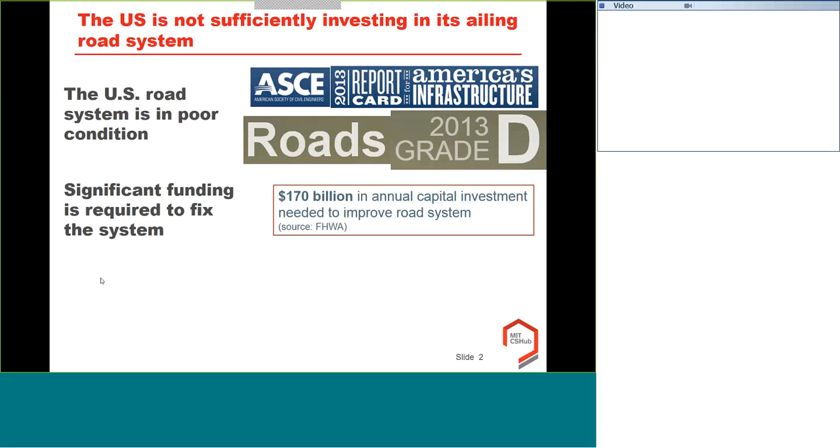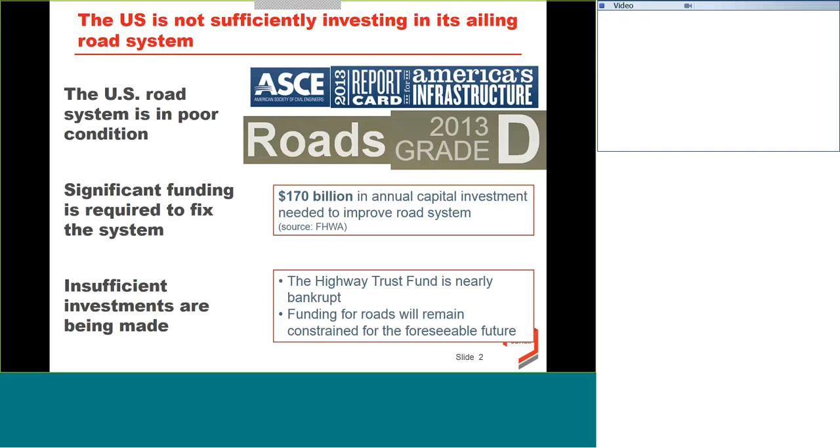We add to this the challenge that insufficient investments are being made in the road system, and so as a consequence, we have this challenge of how do we deal with our deteriorating road system within an environment of limited funds.

That just adds to the financial pressure that governments are dealing with. Another element in this environment is that the FHWA has issued new performance management rules due to the MAP-21, or Moving Ahead for Progress in the 21st Century legislation that was passed a few years ago. FHWA just recently issued new rules about what transportation agencies need to do in terms of their asset management plans.

There are several measures related to tracking conditions and setting targets, but some of the ones we're particularly interested in are related to what they're going to do for risk analysis, life cycle planning, and what are some of their investment strategies. That's all, I think, related to getting the most out of the investment dollars that we have.

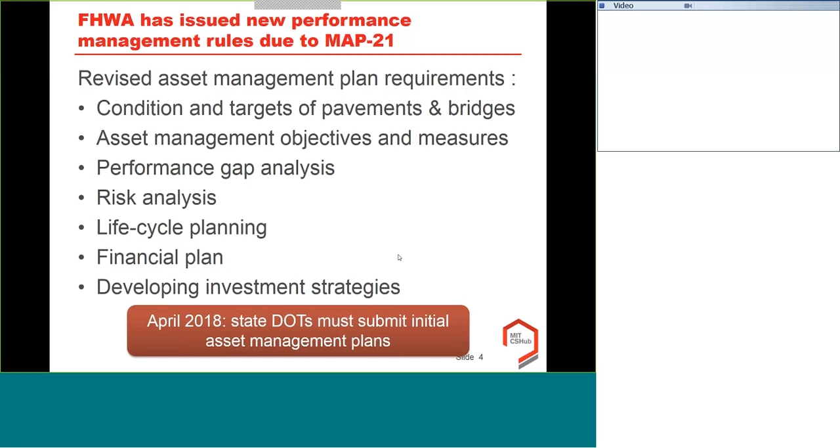DOTs are thinking about this a lot now because they have to submit initial plans for how they're going to meet some of these rules by next April.

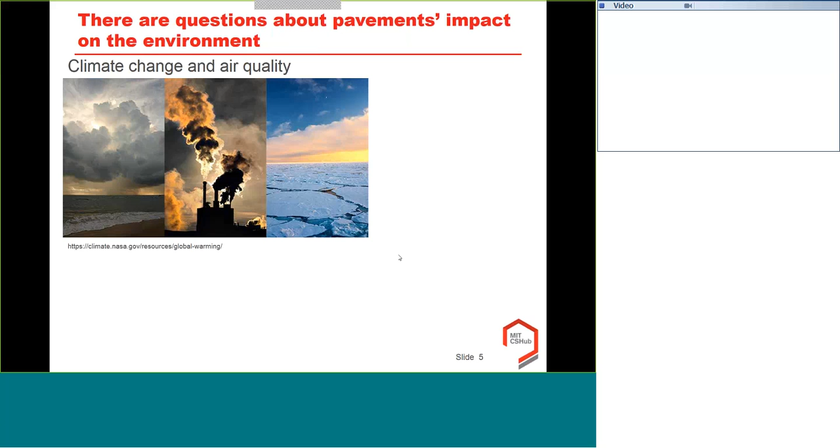Another element that plays into this is that there are a lot of questions about pavements' impact on the environment, whether it be about climate change or air quality. People are interested in pavements and also the vehicles driving on the pavements. Urban heat islands is another big topic, and people are interested in how the pavements in our cities may or may not be contributing to those issues.

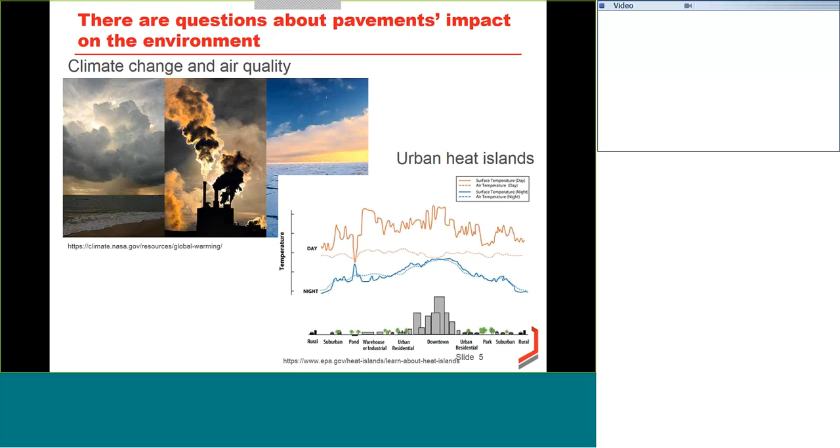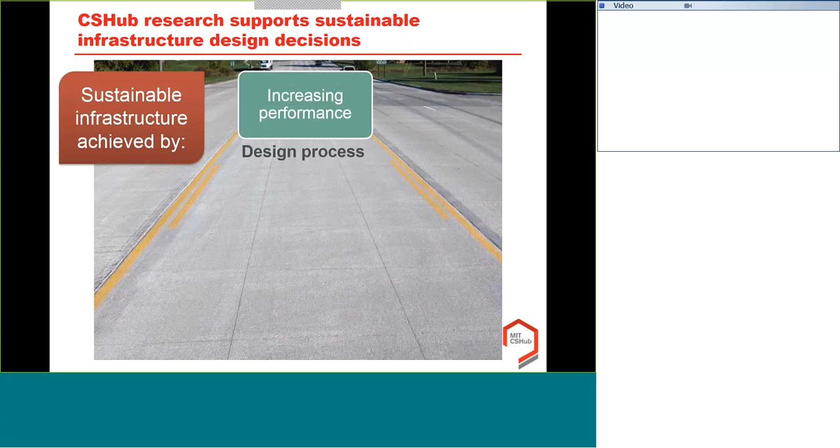The research we're trying to do at the Concrete Sustainability Hub is meant to really support sustainable infrastructure design decisions, and we see that sustainable infrastructure is achieved by a balance of a couple different factors. One, you need to increase the performance of the pavement or whatever type of structure you're interested in. Two, you need to reduce costs, and three, reduce environmental impacts. That's how we really get the most bang for our buck.

What's challenging about this is that you really need to analyze and balance trade-offs in these three different areas, and there are a couple different techniques you can use, like to increase the performance.

What you want to do is use the design process to reduce cost—a method I'm going to be talking about, lifecycle cost analysis, can be done for that—and for reducing environmental impacts, you can use lifecycle assessment.

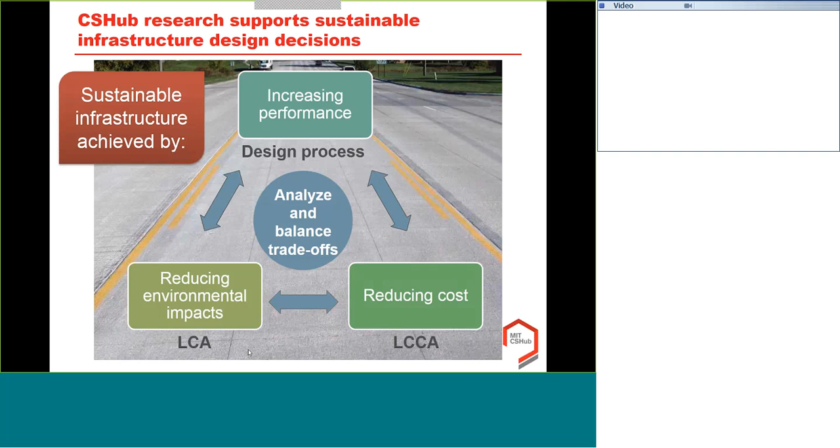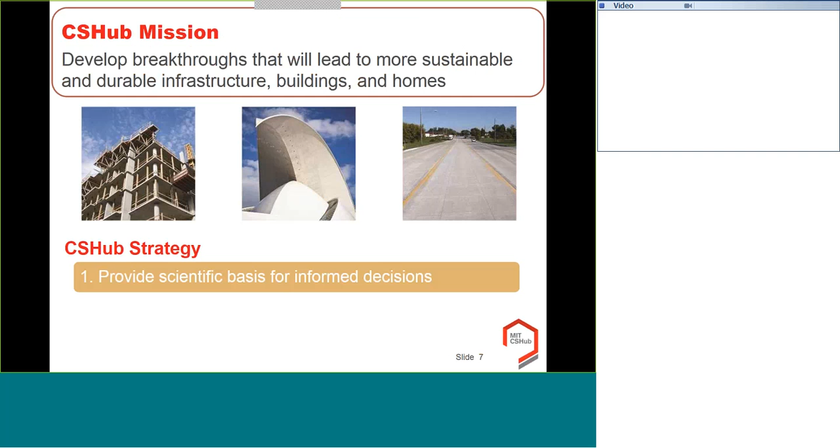So all those things need to be looked at together, and that's something we try to do in the hub. Our mission is to develop breakthroughs that lead to more sustainable and durable infrastructure, buildings, and homes, and we do that with a three-pronged strategy: one, providing a scientific basis for informed decisions; two, demonstrating the benefits of a life cycle perspective; and three, transferring research into practice.

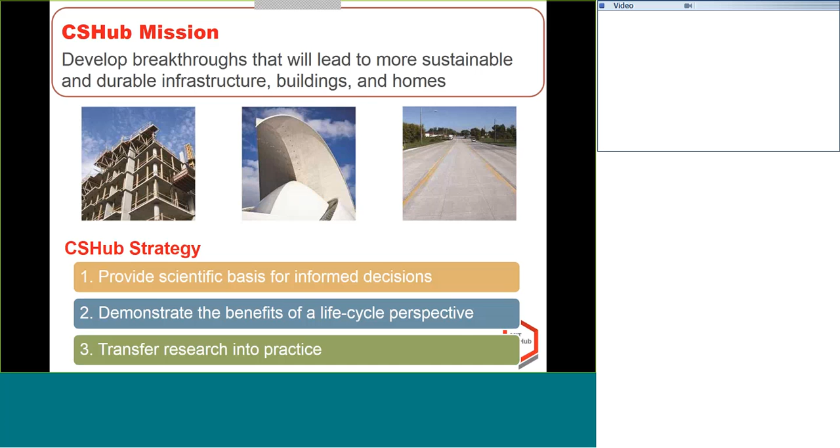And some of those will be themes throughout what I'm going to be talking about today.

But I think a unique element of our team is that our approach is holistic and multidisciplinary. We have people who specialize in material science and what's happening in cement and concrete at a very small scale, people who specialize in engineering related to pavements or buildings, and people who look at economic and environmental issues as well. So we try to look at all those things together in order to support those sustainable design decisions.

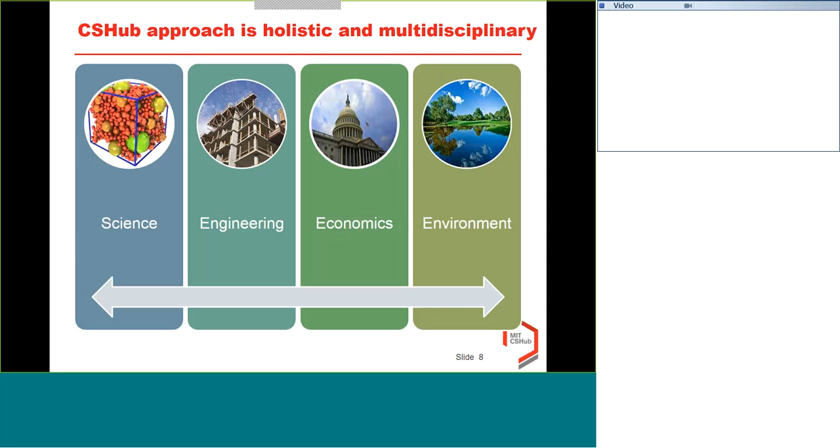Our pavement research goals really are trying to drive the pervasive use of life cycle costing and life cycle assessment for pavement design, pavement type selection, maintenance decisions, and asset management. I think that long-term perspective is really important in all those areas. But when you take that long-term perspective, it's important to have a robust decision-making process—meaning that you're confident in the results despite any types of uncertainty or risk you may run into.

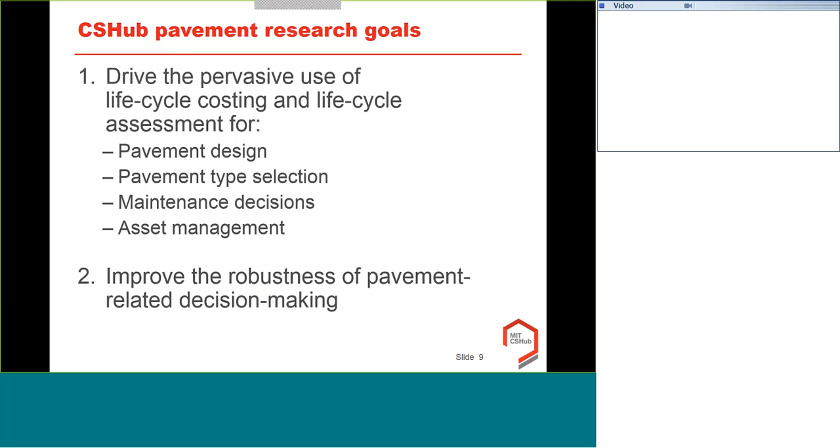So going back to these different topics that we have, these are showing some of our different research topics down here that fall within these different buckets. And then these topics also fall into, some of them are more related to specific pavement projects, and some of them are more related to pavement networks.

So we have some research being done on the durability of concrete pavements that's really heavily on the science side, but also involves some engineering. We also have some research looking at the environmental impact of pavement albedo, which is related to the reflectivity of the pavements. That's also heavily involved in science and some engineering as well.

We have some research on pavement vehicle interaction, which has to do with the rolling resistance of vehicles on the pavements, and I'll talk about that—that's pretty much in the engineering bucket. And then there are several topics on the economics and environmental side as well.

Life cycle cost analysis is really geared towards individual projects, as is life cycle assessment. But there are also some network analyses that can be done as well, and I'll be talking about some work we have to look at how you allocate funds across different pavement projects, and also some network analyses that can be done of pavement vehicle interaction.

I'm also going to be talking about some work we've done looking at inter-industry competition, which kind of falls in between that network and project scale. But what you'll probably notice about all these is that they really are representative of that balance I mentioned we need to have between analyzing performance, cost, and environmental impacts.

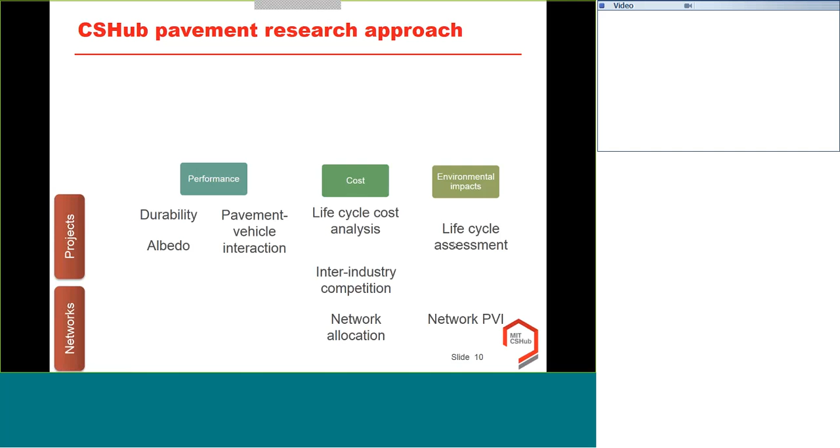Basically, these topics over here are mostly about performance, whereas we have quite a few about cost and environmental impacts. And that's because we think those really have to be viewed together.

What I'm going to be talking about first is basically our research that's more at this project level scale, so pavement vehicle interaction, life cycle cost analysis, and life cycle assessment. Then in the second half, I'll get more into some of these network related analyses and leave the durability and albedo topics for their own presentations at a future webinar.

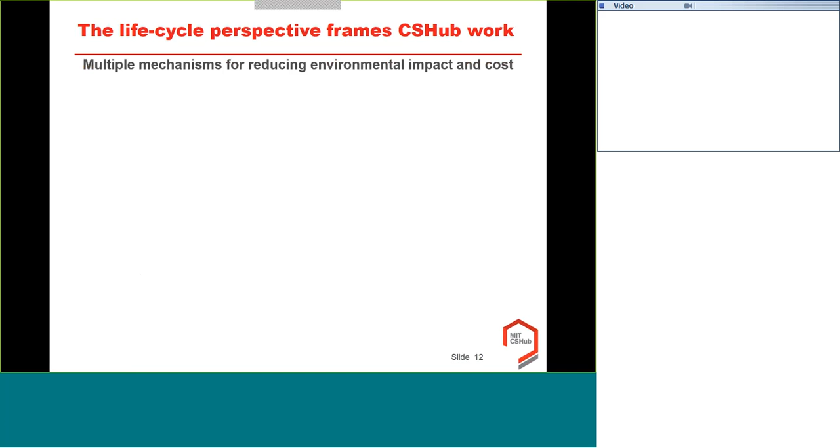All right, so on the life cycle side of these things for particular projects, this life cycle perspective is really important for the work that we're doing. And the reason is that there are multiple mechanisms for reducing environmental impact and cost.

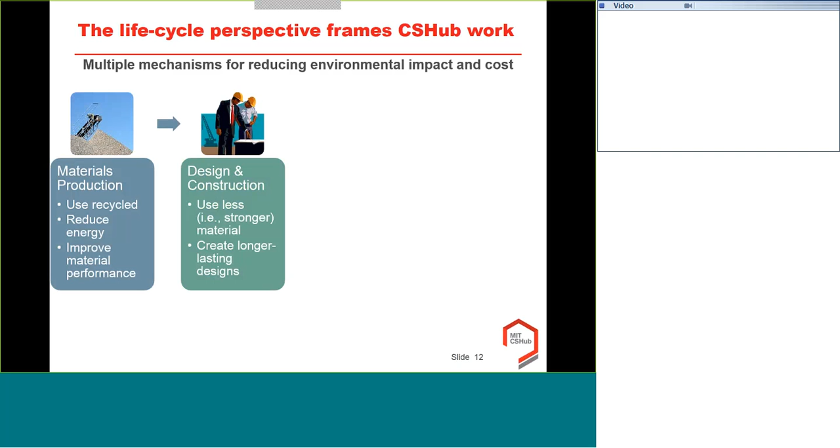One can improve materials production by using recycled content or reducing energy associated with that, improving material performance. One can also design or construct pavements so that they use less material, perhaps by using stronger material or creating longer lasting designs. You can also design them so that they reduce the amount of vehicle fuel consumption or heat island effects and enable material recovery at end of life.

The key thing is that any one of these different strategies could have implications on the rest of them, and their significance also needs to be compared.

So to really prioritize which of these mechanisms is going to be most important requires a trade-off analysis of performance and life cycle environmental impacts and costs. You really need to see that in the whole life cycle perspective.

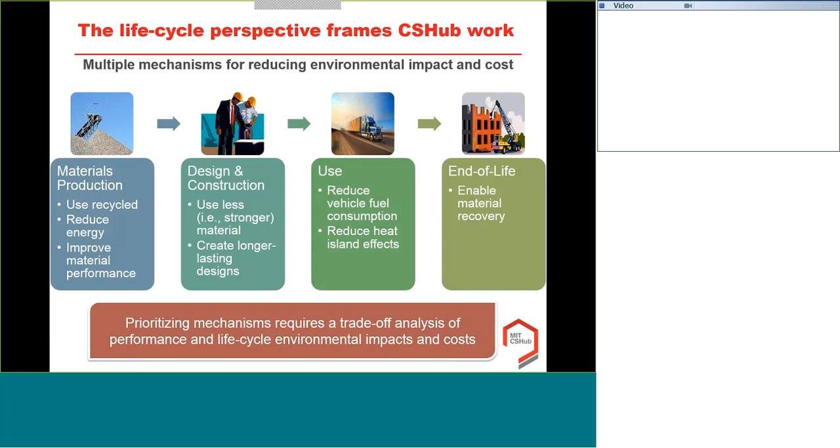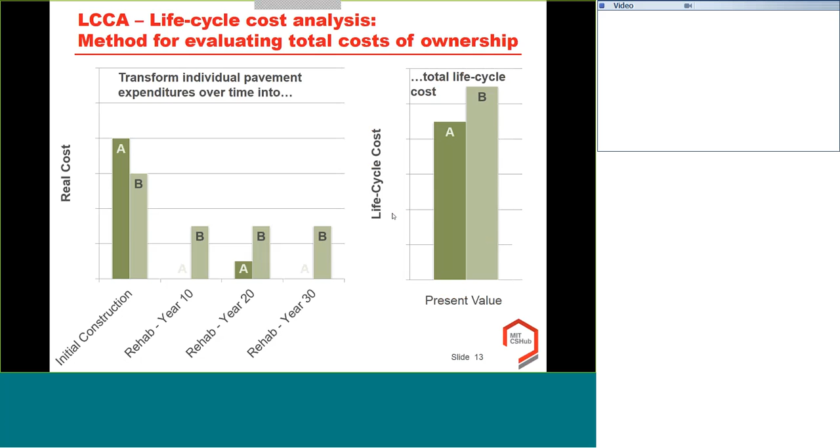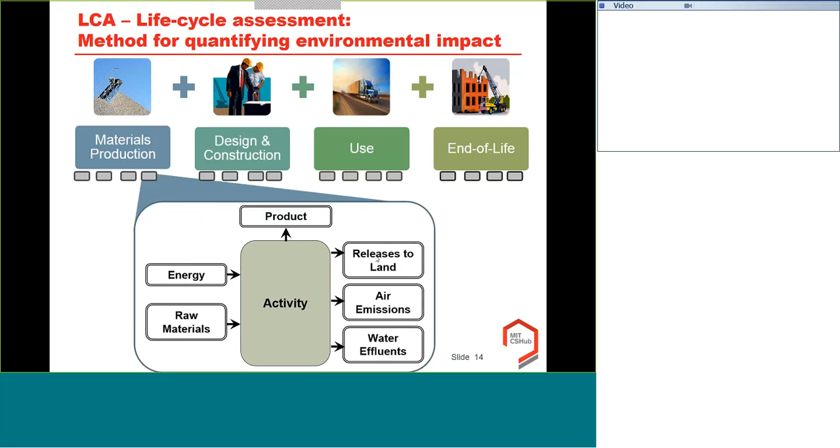Now, these processes can be and have been used for pavements, but a big motivation for us is thinking about how you can integrate these into the design process. The issue is that pavement design is iterative. If we talk about a general design process, what usually happens is that there's a design proposal based on a particular context: what the kind of traffic is, what the climate is, what the soil conditions are.

We start with that initial design proposal, and then what's increasingly happening is that design is analyzed using mechanistic empirical design principles. So we check: does it meet our performance requirements? Does it last for a certain number of years? And if not, then we might iterate and make some tweaks, making it thicker, changing some of the materials, whatever it is, until we come out with a final design.

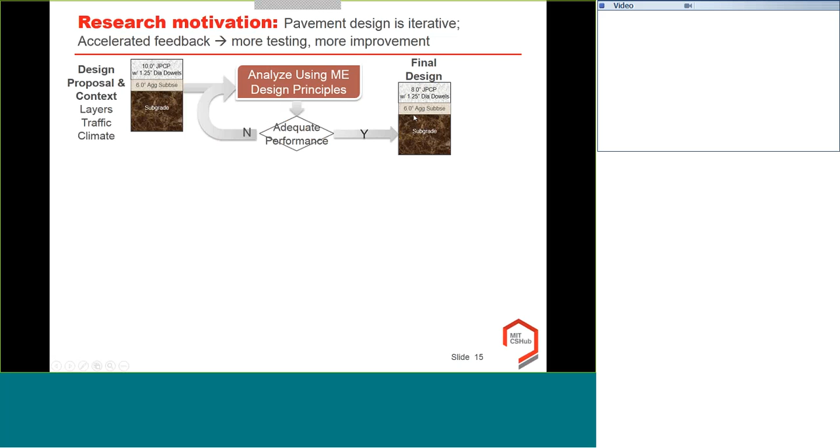What currently happens now is that if you're going to do a life cycle assessment or a life cycle cost analysis, you take that final design and develop what we call a bill of activities, which is basically all the details we need as inputs to do that LCA and LCCA. As a consequence, when we do that type of analysis, we don't have any opportunity to change the design. There's a disconnect—we're only doing analysis on a final design.

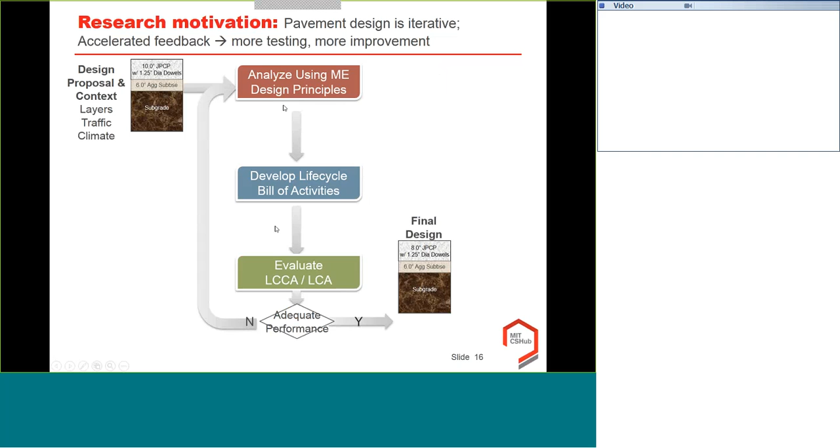Instead, what we'd like to see is that each time you analyze the design, not only do you analyze its performance requirements, you also analyze its cost and environmental impacts as well, and then can iterate on all of these three things together, so your final design is kind of an optimization of all of those things together. So what we're trying to do is integrate these three different things within our project level analysis.

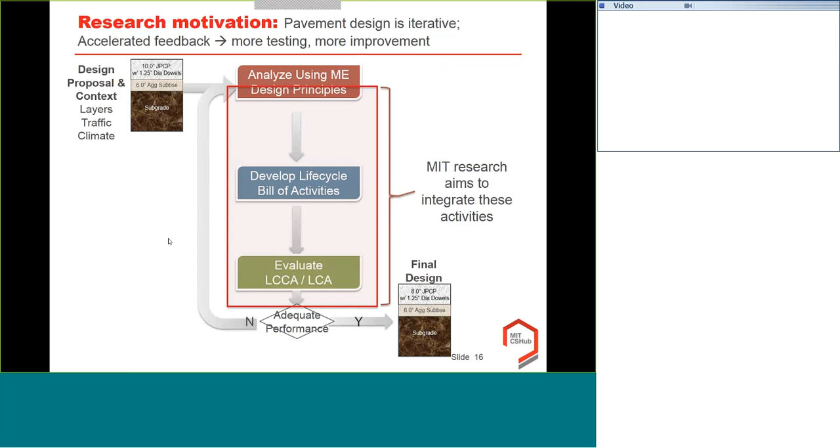What I'm going to do is talk about some of the key accomplishments from our work in this cost and environmental impact space, and then shift to some of our key findings. One of the things we've done in this space is create a linkage between design tools and evaluation.

We used the Pavement ME software to get outputs that can then be direct inputs for generating this bill of activities that would allow us to do LCAs and LCCAs. Basically we have it as an add-in to that software that can then be used in a coupled fashion to look at all these things together.

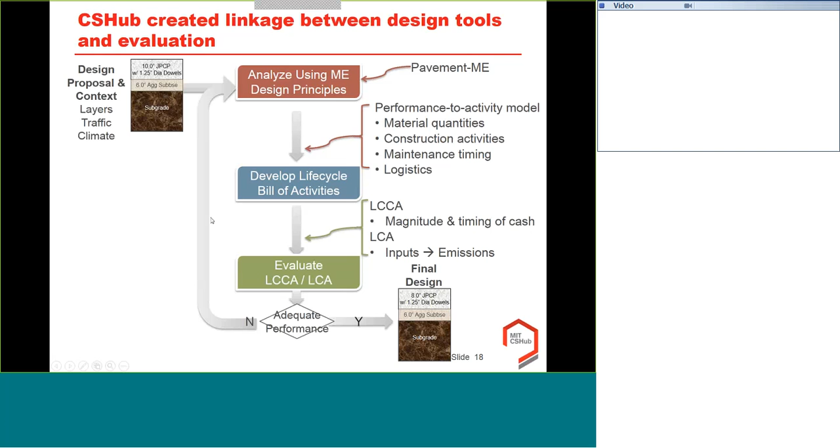The other thing we've done is develop some models that can be used to calculate excess fuel consumption of vehicles due to pavement design and maintenance. What we're looking at here is what I mentioned earlier, this pavement-vehicle interaction, which is essentially a measure of the rolling resistance of vehicles driving on pavements.

There are a couple different elements that we quantify. One is deflection, and that's related to the weight of the vehicle and how much of an indentation that then creates into the pavement.

And so the more of an indentation there is, the more it's like the vehicle is continuously driving uphill. The other mechanism is roughness, and this is associated with how bumpy the surface is. And the more bumpy it is, the more energy that has to be absorbed by and dissipated by the shock system in the vehicle. And so both of these create excess fuel consumption.

What I mean by that is there's a certain amount of fuel that's associated with a vehicle driving on a perfectly rigid or perfectly smooth pavement, and we're quantifying that additional amount of excess fuel consumption. So there are some existing models that are available that we use to quantify this, but we spent quite a bit of time developing our own quantitative models for deflection.

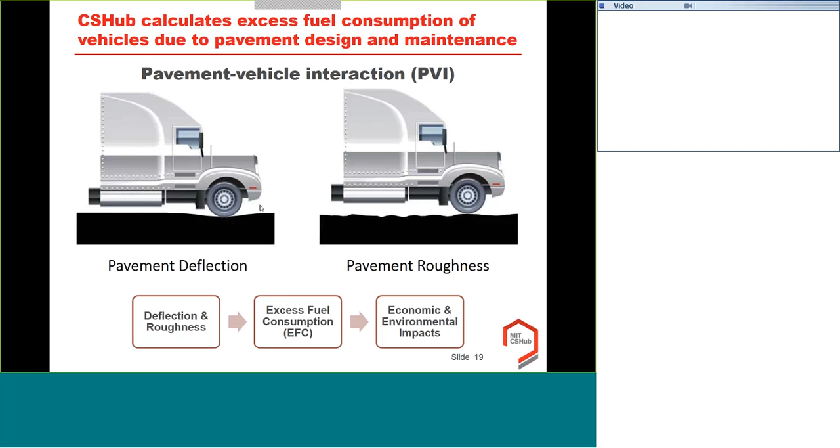What we do is we use all those sets of models to quantify the amount of deflection and roughness for a given pavement. Then we can quantify excess fuel consumption, and then from that we can look at economic and environmental impacts of this excess fuel consumption. So for any individual vehicle, this may not be a particularly big deal, but when you multiply this excess fuel consumption across all the vehicles that drive on pavements, it can be significant.

So the other thing that we've done is created probabilistic life cycle cost and environmental impact models. By probabilistic, I mean we're accounting for uncertainty. So we account for uncertainty in initial and future costs, in the environmental impact associated with these types of activities, material quantities, pavement deterioration, excess fuel consumption. So all those things we account for uncertainty, and we do it across the entire life cycle.

So looking at materials, construction, maintenance, and end of life, and then also adding in this use phase of the pavement. So things that are not directly about the materials or the construction, but are more what are the impacts of these materials. And that's a little bit more of a recent development within the community of researchers who do this type of work, but it includes that excess fuel consumption I mentioned, and also albedo and a couple other things as well. So we quantify those things.

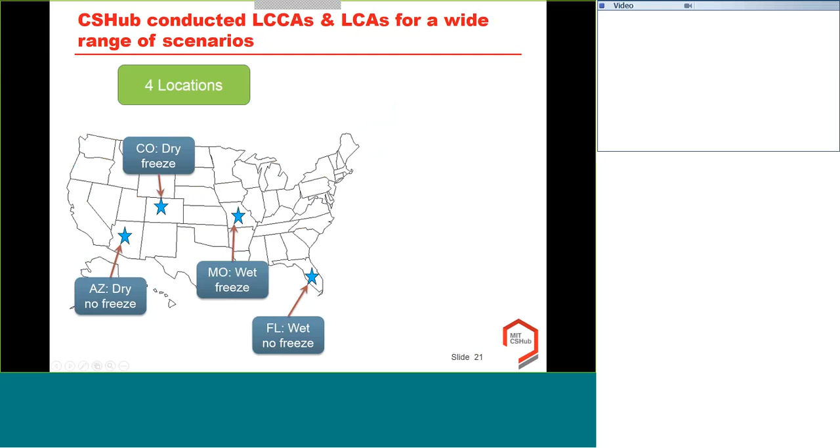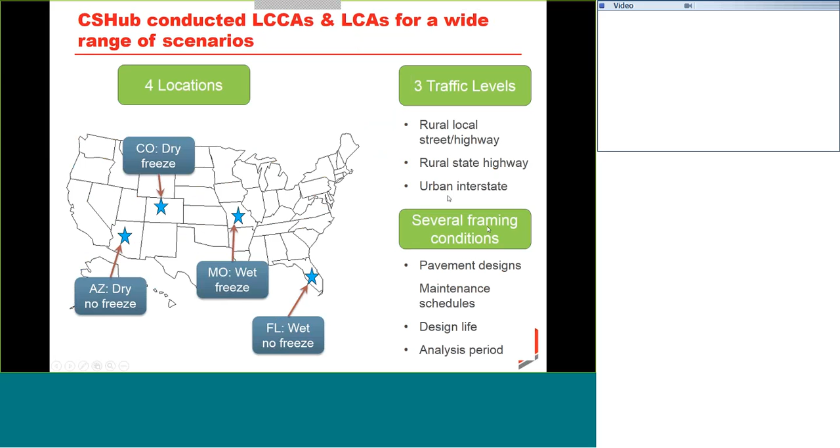And then what we wanted to do was to basically see how significant these factors were across a range of different contexts. So we conducted life cycle cost analyses and life cycle assessments for a wide range of scenarios, in particular in these 4 different locations that had different climates. And then we also looked at different traffic levels, and a couple other things associated with the framing conditions, the different types of pavement designs or maintenance schedules, and a couple other elements there.

So I'm going to shift gears now and tell you what we found based on some of the work that we've done in this space. Just to summarize some of the key findings from our work in life cycle cost analysis and life cycle assessment: One is that this life cycle perspective matters, it's really important. Another is that pavement-vehicle interaction matters, and it can be significant. Third, the context really matters and can really influence your outcomes. And fourth, risk matters, and it's really beneficial to take that risk perspective. So let me talk about each one and demonstrate what I mean by that.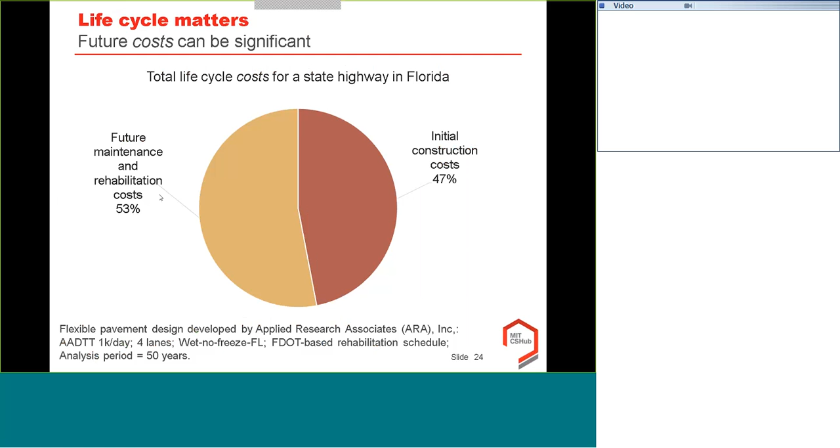What this is showing right here is basically total life cycle costs for a state highway in Florida. There's some details on it down here, but basically what you can see is that initial construction costs are about 47% of the total life cycle cost, but the future maintenance and rehabilitation costs are 53%. So making your decision based on these total life cycle costs is really important, because that can be over half of the total.

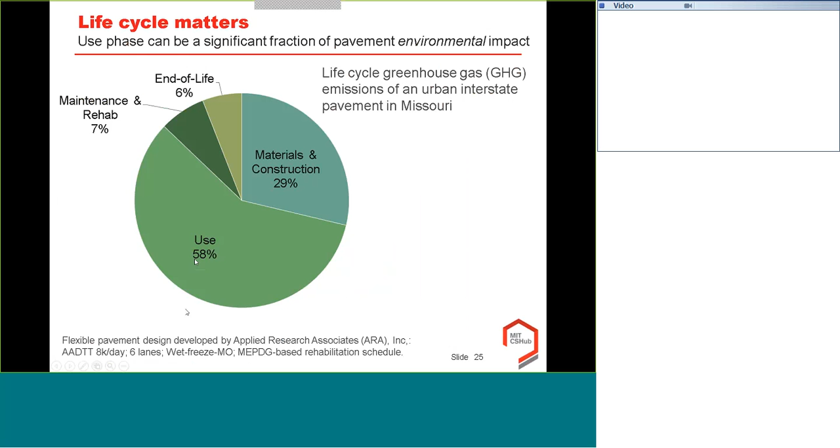The other thing is that from an environmental impact perspective, that use phase can be significant and even more than what we saw in cost. This is showing here life cycle greenhouse gas emissions of an urban interstate pavement in Missouri. What you can see is the impacts associated with materials and construction are about a third, maintenance and rehabilitation are about 7%, end of life 6%, but that use phase is almost 60%.

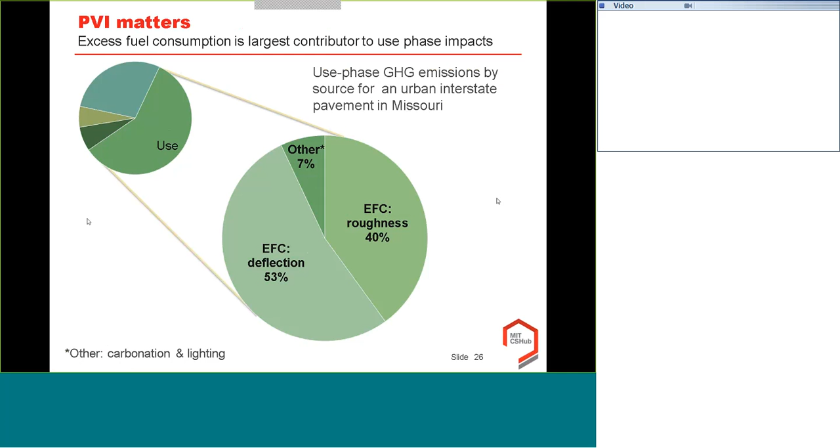And when we take a dive into that use phase, looking into that total right there, what we see is that excess fuel consumption, either due to deflection or roughness, are the largest contributors to that. So, at least when it comes to greenhouse gas emissions, which is what I'm showing here, that PVI really matters. We have different scenarios where we can see where roughness matters more, deflection matters more, but that's an interesting conclusion, at least, that this use phase can be such a big driver.

So all this is to say, I'm not really getting into what the totals are and how they compare. It's mostly just that what your cost drivers are going to really depend on your design, your traffic level, and your location. So it's hard to draw generalities from that.

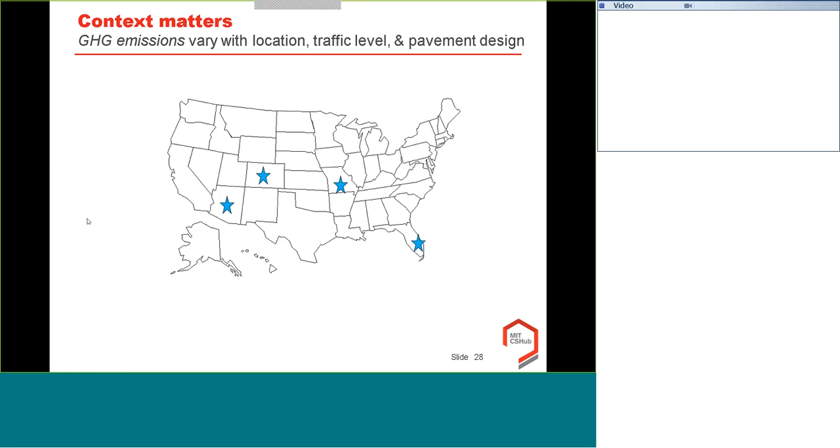When it comes to greenhouse gas emissions and how those vary, the context also matters right here. So what I'm showing here are initial impacts, which is basically about materials and construction, rehabilitation is maintenance rehabilitation, and then end of life is right here. What you can see in this example, again, for an interstate with a rigid design, the use phase is about 57% here, and rehabilitation is pretty small. But then when we go to a local highway with a rigid design, the use phase decreases, and that's primarily because you have less truck traffic and less traffic overall on that local highway.

When we go to look at a state highway, we see with a flexible design, just a different breakdown here, with rehabilitation being a bit more. And we compare that state highway with an interstate, where we see the use phase increase again, basically because you have higher levels of traffic, and particularly truck traffic. So once again, all this is to say it's hard to draw generalities about this, because the context really matters and should be really analyzed in any type of comparison like this.

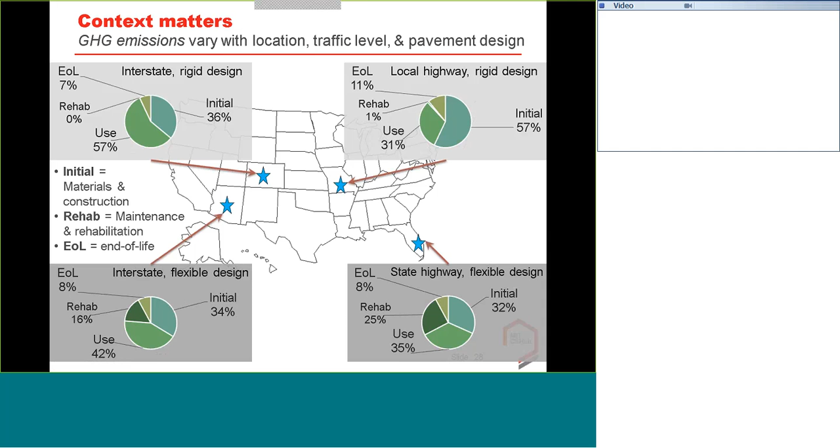So my last point in this space is that risk really matters. One of the benefits of using that probabilistic approach is that we can look at the impact of different levels of uncertainty. This is showing the outcomes of a life cycle cost analysis. I have life cycle costs on this axis here, and these are called cumulative distribution functions, or CDFs. This shows the cumulative probability that we get a particular result, and it shows it for two different designs.

So how you look at these is that, for example, you could say I have 50% confidence based on the uncertainty that these two designs will have a life cycle cost of about $3.1 or $3.2 million per mile. So at 50% confidence level, they're about the same—maybe design 1 is a little bit less than design 2. However, if we took a 90% confidence result, which is often what engineers use when looking at design parameters, there's a much bigger difference, about 12%. Here we see design 2 is now lower than design 1.

Another way we can look at this is to ask what's the risk of exceeding a particular cost—what's our risk of exceeding, say, $4 million per mile? What you can see is that in design 2, it's about 1%, and in design 1, it's about 9%. So particularly when we're talking about assets such as pavements that last for decades, we think that incorporating that risk is really important.

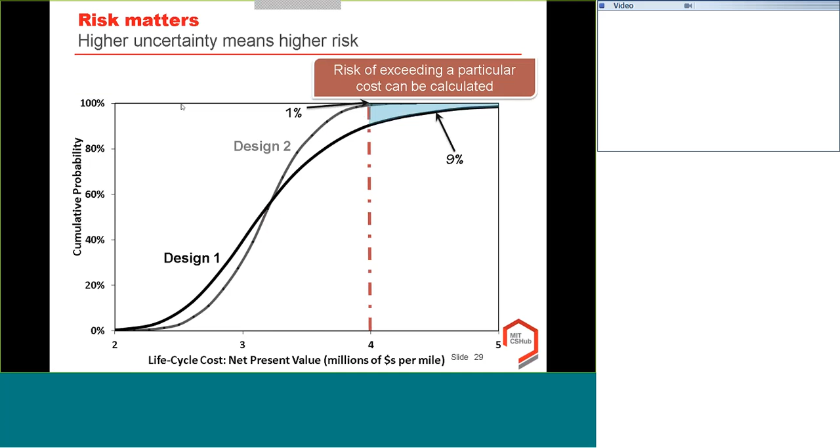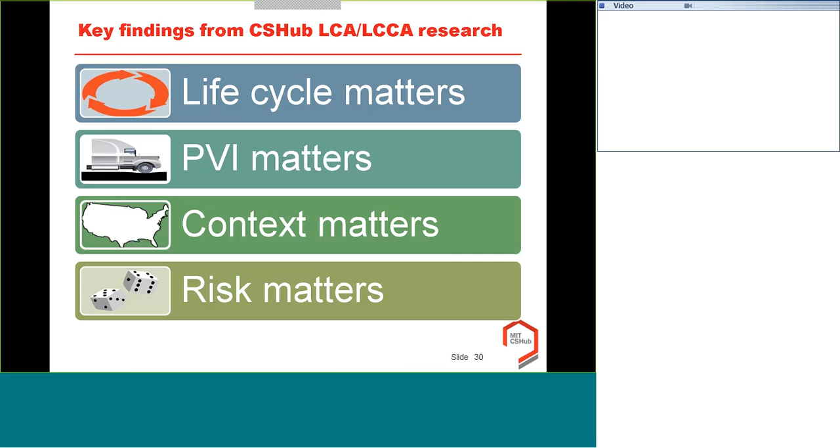Alright, so just to summarize these key findings from our life cycle assessment and life cycle cost analysis research: this life cycle perspective really matters when making decisions about these pavements. PVI matters and can be significant. The context really matters, and risk matters, okay?

What I'm going to do now is shift gears and talk about more of the network-related research that we've been doing. First, some economic analyses about inter-industry competition, and then also some network analyses related to allocation and network PVI.

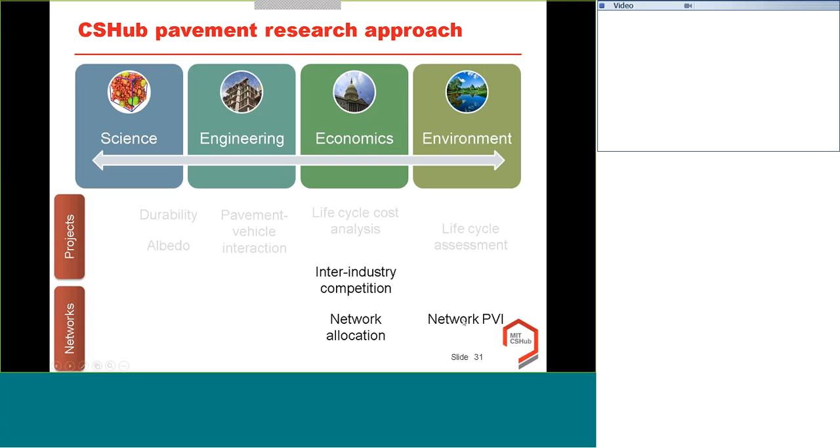What are the key findings from these network-related analyses? One, we found that viable competition is really an opportunity. Two, PVI data can be used in network pavement management. And three, diversity of maintenance, rehabilitation, and reconstruction alternatives is a means to enhance network performance.

Let me dive into each one, starting with the competition analysis. Our question was: does the presence of competition between material substitutes impact pavement material prices? There are a couple of different types of competition in any economic environment. Intra-industry competition would be if there are several bidders for a project using the same type of technology. Inter-industry competition would be more between material substitutes.

So in paving, that inter-industry competition is more about concrete and asphalt. But more broadly, we're interested in what factors are driving costs. We analyzed this using statistical analyses of the Oman bid tabs database, looking at 10 years of data across 47 states, about 300,000 pay items across 164,000 jobs.

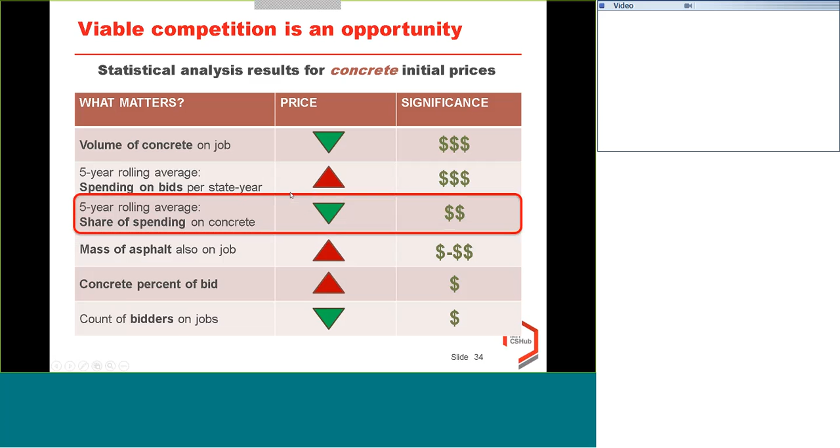There are a couple other things we see here. The one I was talking about with competition: the share of spending in that state on concrete—the more you spend on concrete, the lower the prices are, and this had a reasonably significant effect. Looking at asphalt prices, similarly, the mass of asphalt on the job—the more you have, the more it decreases the price, and that was pretty significant.

One interesting finding is that the more you spend on concrete in the state, the more it decreases asphalt prices as well. So the conclusion is that many different factors can affect prices, and while this is a statistical analysis, it does seem that competition among different industries is an opportunity to lower prices.

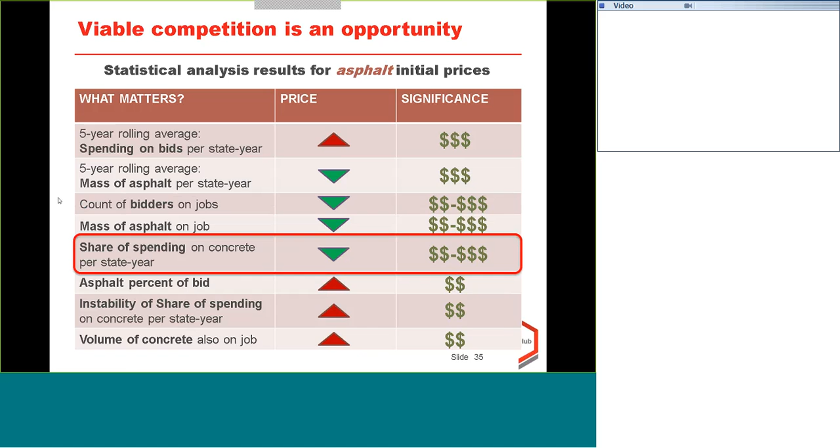Moving on to the next topic, quantifying pavement vehicle interaction. In network analyses, I demonstrated before how we can use PVI to quantify environmental impacts for a particular segment, but we've also done that across pavement networks. This is showing an estimate of excess fuel consumption from PVI in U.S. pavement test sections—this isn't the whole pavement network in the U.S., just test sections managed as part of an FHWA effort called the Long-Term Pavement Performance Database.

It has several test sections in each state, so they monitor pavement performance. We could calculate excess fuel consumption on those segments for a variety of pavement types. This is for one year, and it shows about 700 million gallons of excess fuel in one year. So once again, going back to my statement that for any given vehicle, this PVI may only be a few percent, but when we look at an entire network, it can be much more significant.

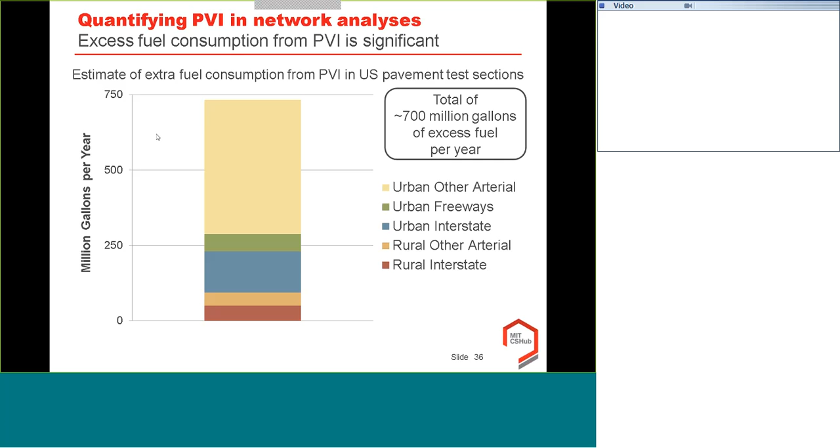So what we've done is also applied those analyses to excess fuel consumption in different networks. This is showing an analysis we did for the Virginia interstate pavement network. Based on data from the state, we could calculate excess fuel consumption due to PVI for cars and trucks on those interstates. Green segments here have relatively low excess fuel consumption, where red is significantly higher.

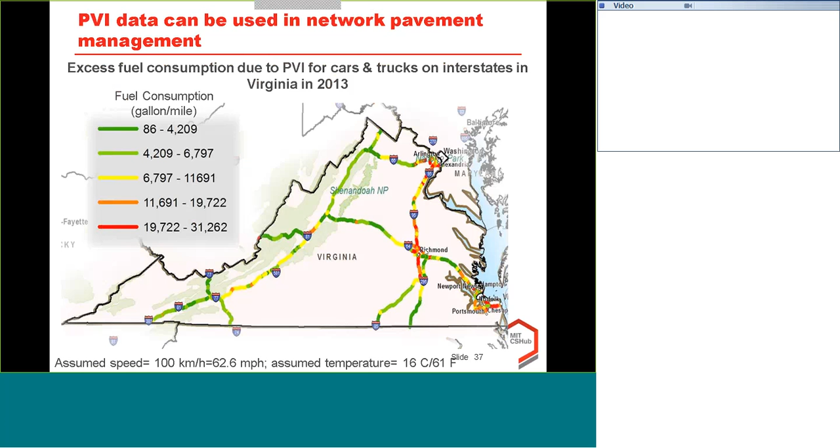What you can see is that in urban areas where you get a lot higher traffic, you have more excess fuel consumption, but that's a combination of the amount of traffic you have and also the state of the road. Doing a deeper dive allows you to see which of those is the bigger factor, and you can do a combination of those different things. So that's just showing excess fuel consumption.

We took this a step further and also did analysis with California's pavement network, looking not just at calculating excess fuel consumption, but also greenhouse gas emissions and metrics related to air quality. You can use this to make a case that the way we design and maintain our pavements has real effects. Another thing we can calculate is dollars - how much are people spending on that excess fuel consumption.

One of the neat things we're able to do with Caltrans is they can provide us with the total footprint of vehicles that drive over the roads in California, which was provided by the California Air Resources Board. From that, we could calculate the contribution of PVI to that total footprint. It ranges here from 0.5% to 4.5% or so.

The significance can be interpreted in different ways, but one way to think about it is that in order to decrease this footprint, you either have to make significant changes on the vehicles driving on the roads, the amount of fuel they consume, or change driver behavior, or in this case, change some of the practices of the transportation agency. On one hand, changing vehicles and consumers, you're dealing with millions of people, whereas the transportation agency, a couple hundred or maybe 1,000 people. So it's a different scale in terms of what kind of effect you can have.

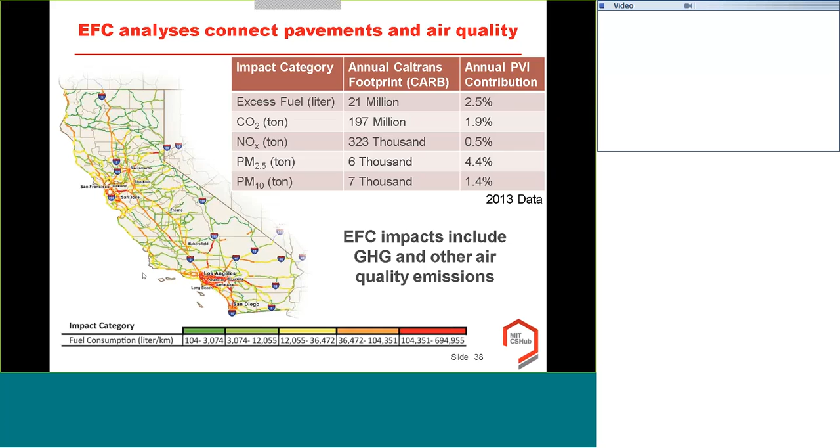So this is about asset management. The goal of our pavement management research in this space is to develop decision support tools that consider project-level decisions, uncertainty and risk, and large-scale problems with long analysis periods and a diverse set of maintenance, rehabilitation, and reconstruction alternatives. This goes back to the FHWA rules I mentioned at the beginning about how you make asset management decisions.

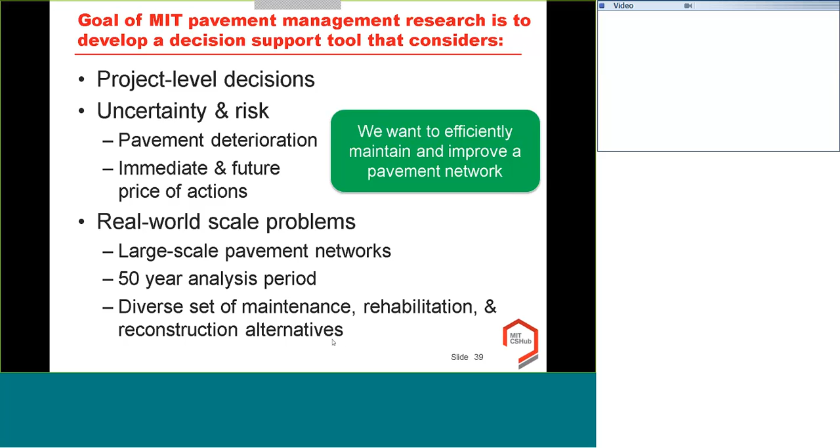One component is collecting data on the performance of your system, but then the next component is how you use that data to make decisions about how you're going to allocate your funds. So we've developed a network allocation model that takes in a couple different elements. One, it takes in the current condition of the system - like with the PVI analyses, you have to understand what type of roads you have, and then what's the deterioration rate of them.

Then project models of what happens in the future. We do this for a couple different elements - we project what prices will be in the future and can capture uncertainty in that, and also pavement deterioration, where we can capture uncertainty as well. When you combine that with a set of objectives or goals, that can go into this literal black box here, which basically involves some optimization algorithms.

We've developed some that are pretty efficient, allowing you to look at a diverse set of maintenance, rehabilitation, and reconstruction actions. This is particularly important because you need to be able to say, essentially in this black box, what if I did this action? What would be the projection in the future? What if I did this one? It allows you to look at a whole bunch to say which ones make the most sense. From that, you can say for each individual project which action should be taken, then for a given year track that performance, simulate what happens the next year, and keep iterating until you've finished your analysis period.

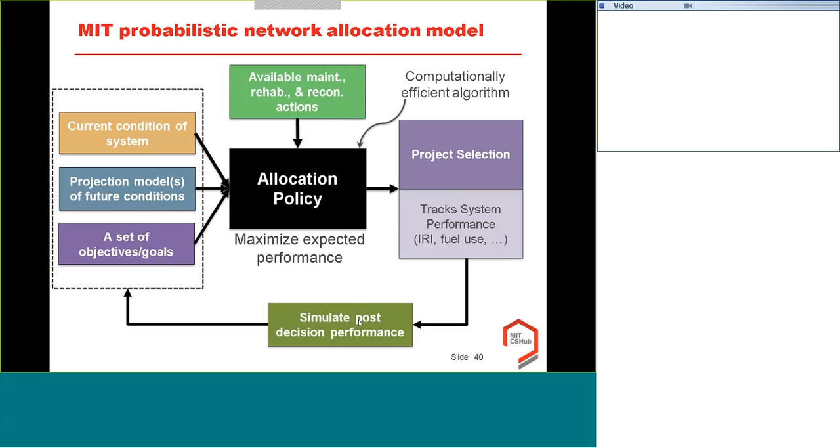Here's an example showing some results that we did with the Virginia Interstate Network. This is showing expected roadway expenditures over a 50-year analysis period. We took that snapshot we had at the beginning and added this network allocation model. Blue means low expenditures per unit area, yellow means medium expenditures per unit area, and black means high.

We gave it a fixed budget of $67 million per year, which is just for these interstates. The objective is to minimize the traffic-weighted roughness. Roughness is a measure of the performance of the pavement, and traffic-weighted tries to accommodate for the different levels of traffic on there.

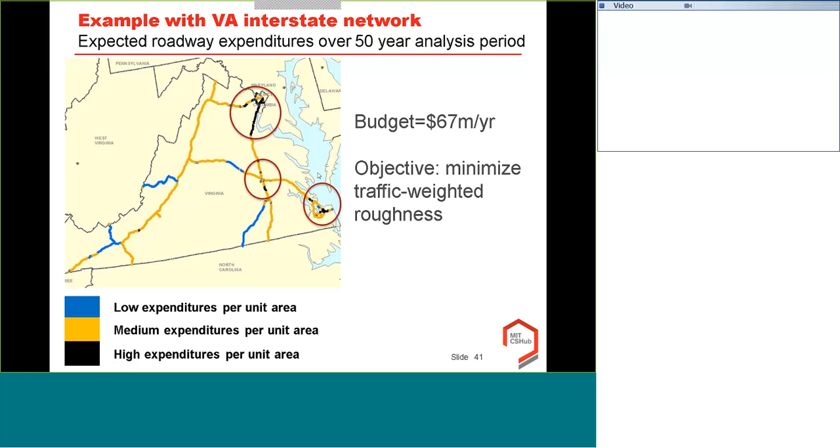What's interesting is that once again, those urban areas are where you get the highest levels of investment. That's where you see a lot of the black, at least where you see the most elements of it, and that kind of makes sense. That's where you get the most traffic and arguably the most deterioration as well.

What's also interesting is that your allocation strategy diversifies over time. The current composition of the system is mostly asphalt with some concrete near urban areas. But when you account for the uncertainty in how prices and performance will evolve over time, the composition changes quite a bit. This is the fixed budget per year, and here's the composition we expect in year 50. That has to do with the diversification of this portfolio of assets, just like you see diversification in a stock portfolio.

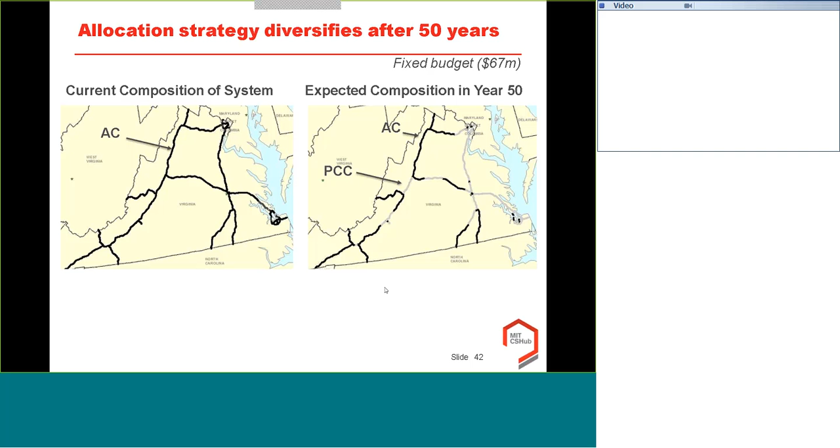What the model accounts for is that if one material is relatively high in price in a particular year and another material's price is relatively low, you want to be able to leverage that lower price option. Undoubtedly, over a long time period, there will be times where that's reversed. This diversification allows you to improve that performance, and this is how we see that manifested.

What I'm showing here is the traffic-weighted IRI over the 50-year period, once again with the cumulative probability. When we look at scenarios where we were able to use a diverse set of maintenance, rehabilitation, and reconstruction alternatives, we get a performance that looks like this. Whereas if we told it to only use concrete, you get a worse performance, meaning a higher level of traffic-weighted IRI, which you want as low as possible. Or even with asphalt only, you get an even worse performance.

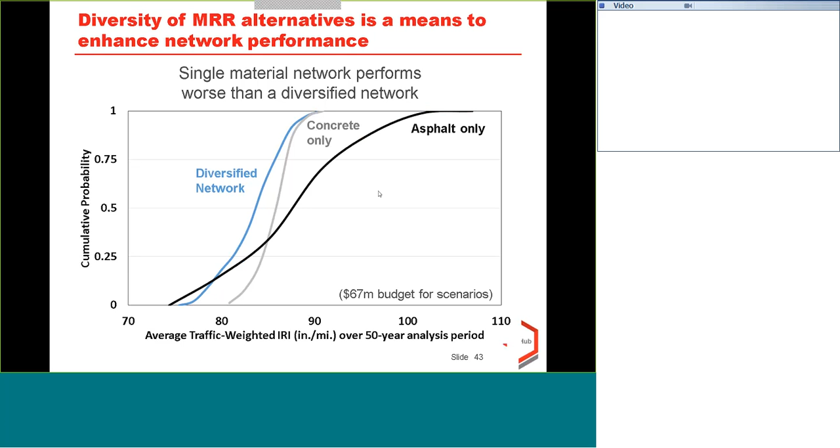So with a larger range of uncertainties, once again what we find is that basically having a diverse set of alternatives is the way that you can enhance your network performance and get the biggest bang for your buck.

So just a reminder of what we found: viable competition is an opportunity, PVI data can be used in network pavement management, and diversity of maintenance, rehabilitation, and reconstruction alternatives is a means to enhance network performance.

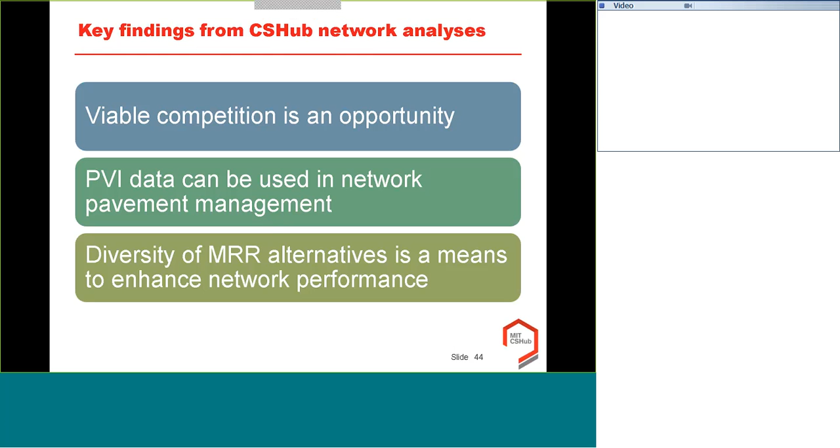What I want to close on is this point: sustainable infrastructure is achieved by analyzing and balancing trade-offs among performance, costs, and environmental impacts. The way that you seek sustainable solutions is to optimize among these three things.

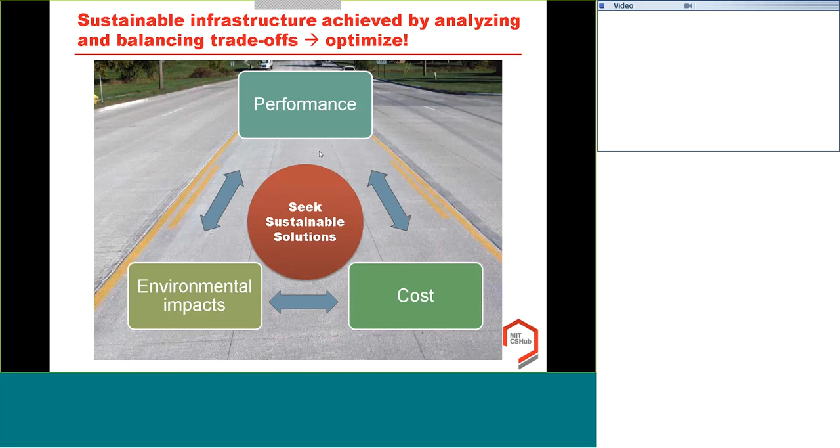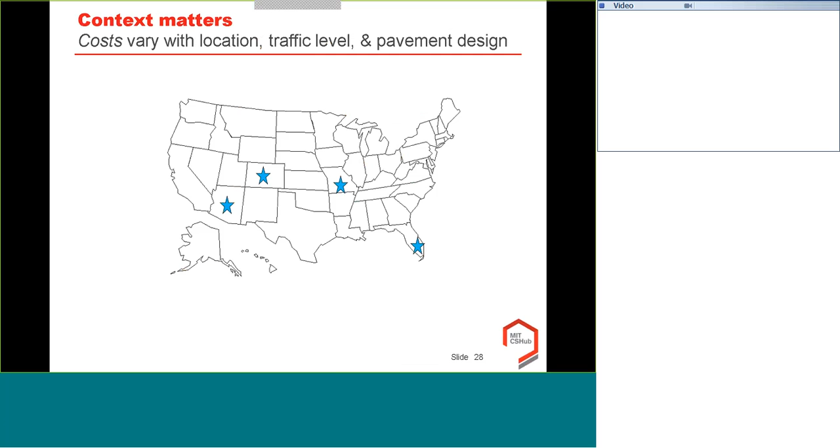Let me see. In slide 29? It might be the one before it showed up at 29, but it might be that one. Yeah, so the short answer is yes.

We have done analyses where we compare designs in all of these different contexts, and we have a lot of details on the pavement designs that went into this. What we did is have a pavement engineering firm, ARA, which is the firm that actually created and implemented MEPDG and the Pavement ME software, come up with what they considered to be functionally equivalent designs for all these different contexts, including maintenance scenarios and things like that.

On our website, we have a document that's quite long that goes into the details on what are the specific pavement designs and what are the assumptions about maintenance schedules. And we have some other reports or studies that have been published where we get into a bit more detail on the cost and environmental impact comparisons of those different designs. So if you follow up with an email, I can point you in the right direction to where that stuff is.

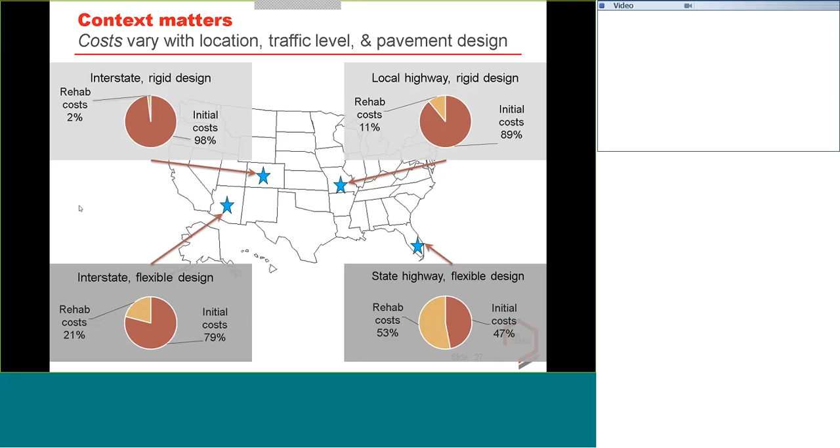The second question was around slide 40 or 41: what percentage of state DOT spending on each pavement type is required to maintain healthy competition?

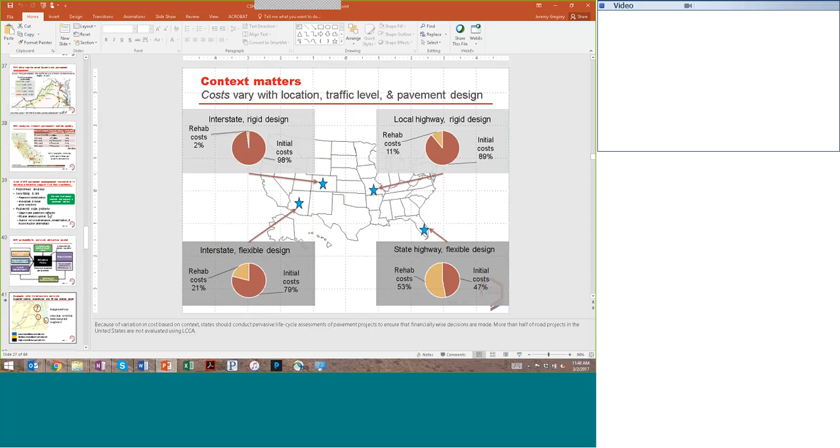That's still a question I think we're trying to ask, and it gets a little bit tricky. The short answer is we don't really know.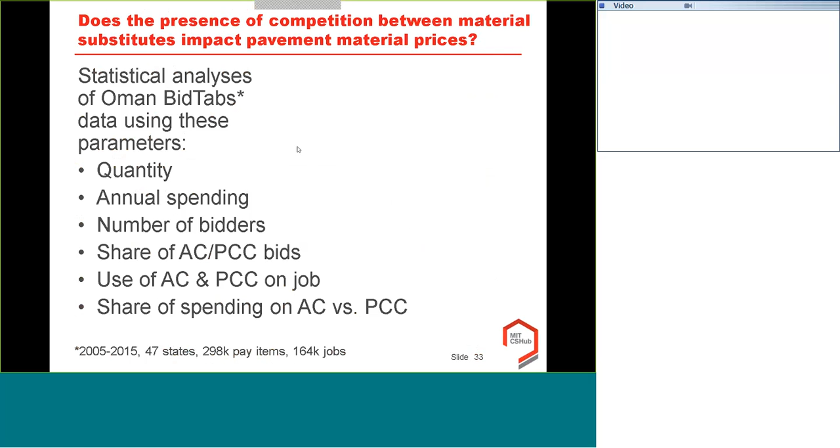I think it's going to depend on what happens in each state. What we did is a high-level analysis here where we looked at the spending across all of these states, but we're basically saying if we draw broad conclusions across what impacts the prices for all the states, this is what we're able to say. But for a particular given state, we don't really have enough information yet to say here's a particular threshold and how it matters. I think part of that is because it will depend on what's the current context for each state and what's the degree of competition that's already there. And then you have to tease out basically how much the competition is affecting prices compared to some of these other things. So it's an interesting question, one I think we'll consider pursuing, since we don't have a solid answer to it right now.

The next question is a broad question, no specific slide: can you briefly explain the difference between a rigid and a flexible pavement design?

Sure, those are just terms for basically talking. A rigid design is generally one that's made with concrete, or here we're using Portland cement concrete, and a flexible design is generally one that's made with an asphalt concrete design. So that's pretty much just the difference—those are different terms for talking about a rigid design being Portland cement concrete and a flexible one being asphalt concrete.

The next question is, how do you quantify the use phase? Is it different from the optimum pavement condition or the total use phase contribution?

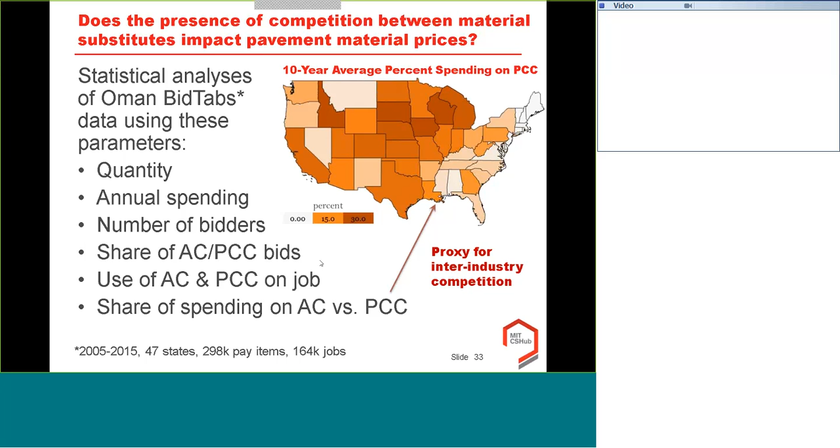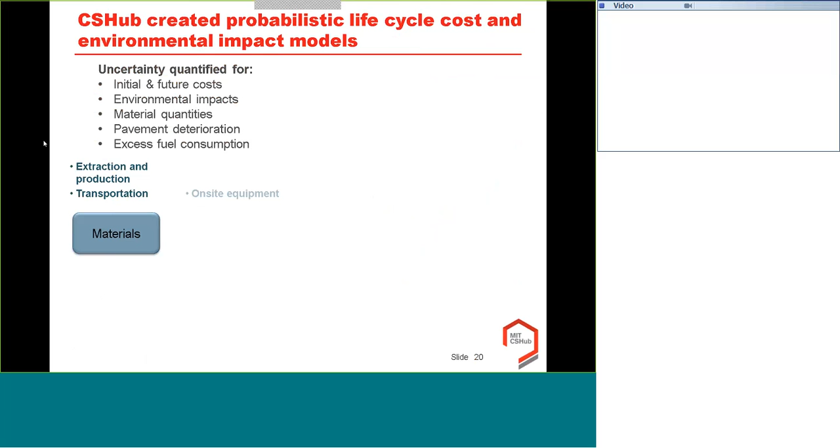What we consider the use phase, all of these elements—materials, construction, maintenance, and end of life—are really focused on materials and construction. The use phase elements are more about the broader implications of that.

For example, this traffic delay one is primarily used in cost analyses. So if there's a rehabilitation project that leads to traffic delay, you quantify the amount of time people spend, and then how much that costs them.

Essentially for all of these things, what you need are models that can quantify the impacts of the pavement design or maintenance on something else. For example, this excess fuel consumption—I mentioned how we have models of the impacts of pavement roughness and deflection on excess fuel consumption. There are also models about albedo and carbonation, so you need other kinds of models to do that.

And once again, if you follow up with an email, I can provide you with a document that goes into details on the various models that we use to do that.

The next question is about PVI. Does PVI have a role in user costs?

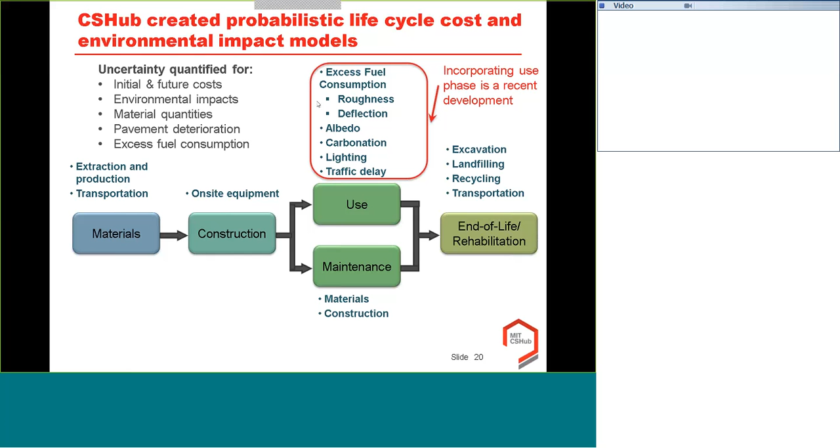Definitely, yeah. I didn't go into that here. I might have a backup slide—let's see, about... it doesn't look like I do.

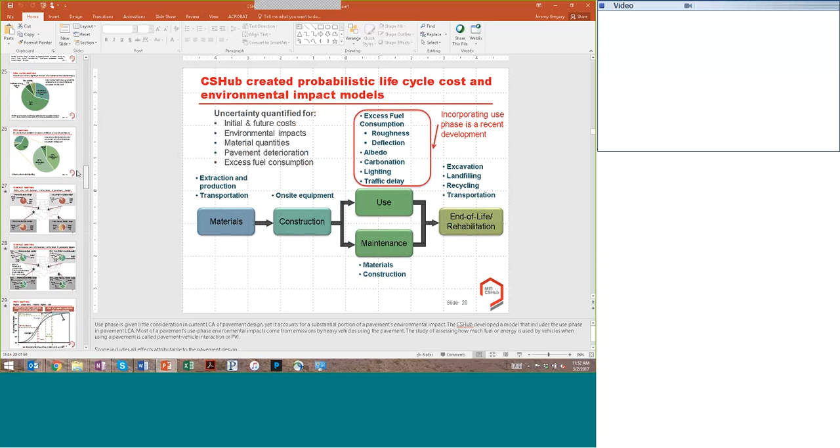But the short answer is yes, it does. Just like what I showed in the life cycle cost slide, that's just costs associated with initial construction costs and future maintenance and rehabilitation costs. Whereas in the life cycle environmental impact, I had this use phase portion as well. We've done that for life cycle cost too, calculating a use phase impact associated with costs for users due to traffic delay and excess fuel consumption. It's not nearly as significant as in the environmental impact.

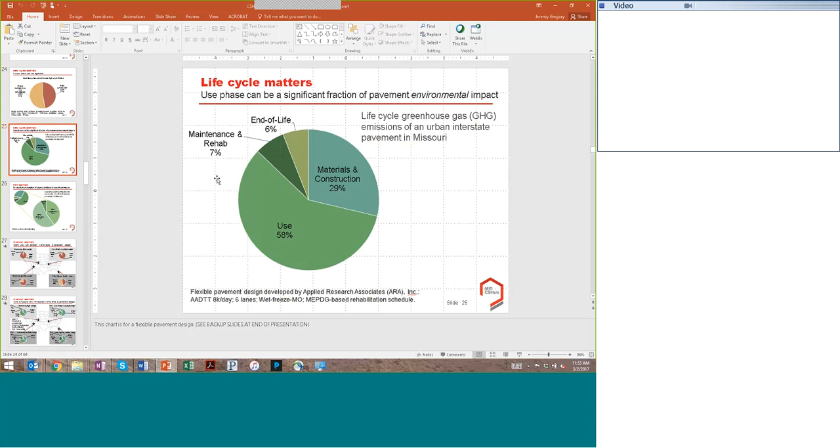Like in a case study we have for an interstate in Missouri, I think about 25% are the use phase costs. But within that, it's almost entirely due to excess fuel consumption as opposed to traffic delays. So you can definitely calculate that, and I can provide references on calculations we've done if you follow up.

We do have time for a few more questions. The last one I have is: what would be the ideal time for the analysis of cost life cycle?

Sorry, let me reread that. What would be the ideal time for the analysis of cost life cycle of pavement, rigid versus asphalt? Like an analysis period, is that what... I believe it's the timing of the life cycle cost analysis. So if you're doing an LCCA of pavement, rigid versus asphalt, what would be the ideal timing for that?

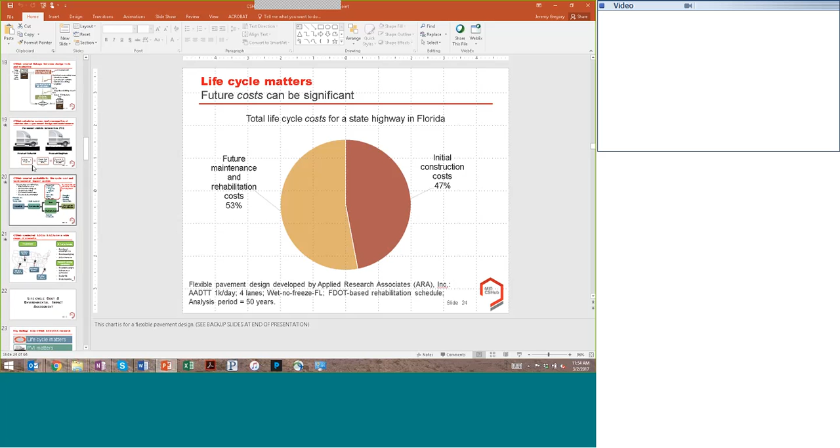I think doing it early in the design process is what's important. So basically, like what we talked about, when you're in the middle of that pavement design process is when you should also be calculating cost and environmental impacts to analyze them together.

I think ultimately what we'd like is that you don't have it as a separate analysis. Rather, whatever pavement design software you're using should also calculate those costs and environmental impacts. So ideally we'd like to see it happen all at the same time.

We don't know of places doing that right now, but I think that's partially because these software tools are viewed as separate. For example, in the US, the FHWA provides a RealCost software. In many states, if they're doing LCCA, they use that as a baseline, but someone basically does a separate LCCA, and ideally we think they should just be done together simultaneously.

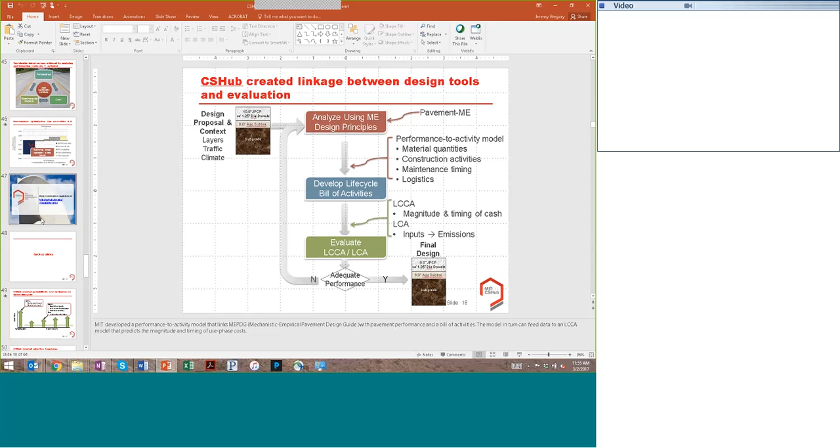What we'll be doing in future webinars is going into a bit more detail on many of these topics. So if something seemed a bit too high level, fear not—we'll probably go into it in more detail in the future.